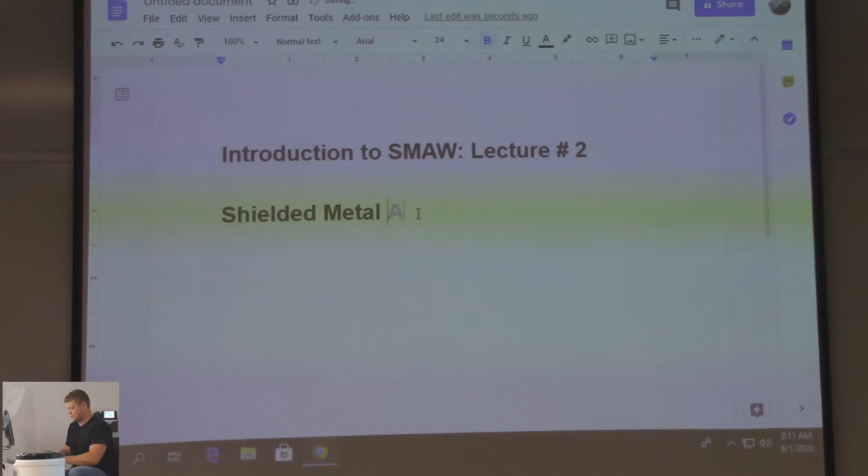So shielded metal arc welding refers to a method of joining two pieces of metal or adding metal to an existing surface. So that'd be like a surfacing weld. You're just trying to build it up. That's pretty much what you're doing with these blocks. You're just building it up, right?

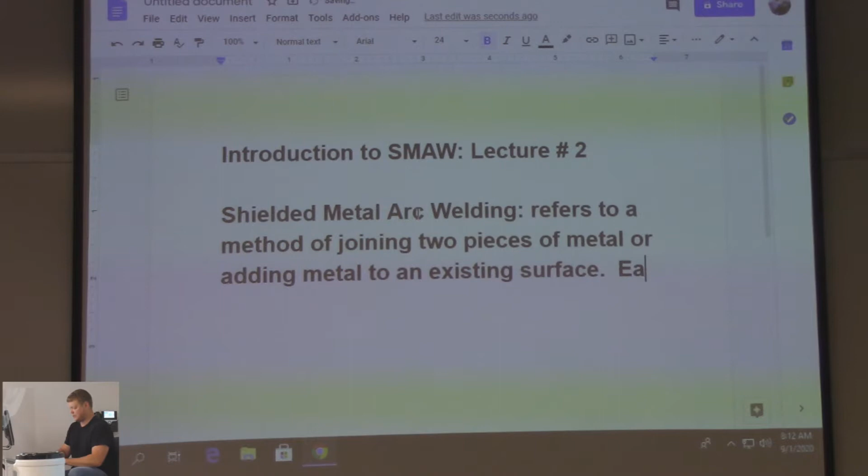Each word conveys an attribute of the process. So we're just going to break down the actual term, well, phrase, shielded metal arc welding. First word is shielded.

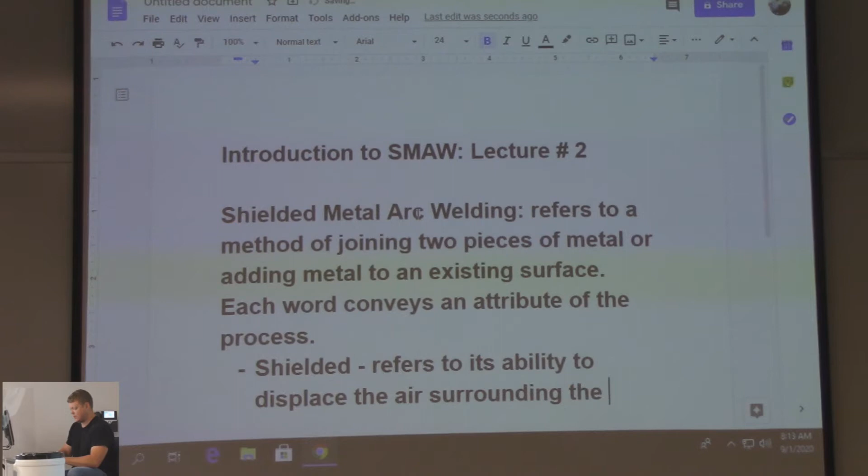Refers to its ability to displace the air surrounding the weld to avoid harmful effects of the gases in the air.

Atmosphere is made up of 79% nitrogen, 20% oxygen, some CO2, some other stuff, argon. If it gets into the weld, it tries to escape as it's solidifying and gets all this porosity. That's why you gotta have some kind of shielding. The stick welding is the flux. MIG and TIG has a separate shielding gas, right? That's why they have the tanks on the back that we were just talking about.

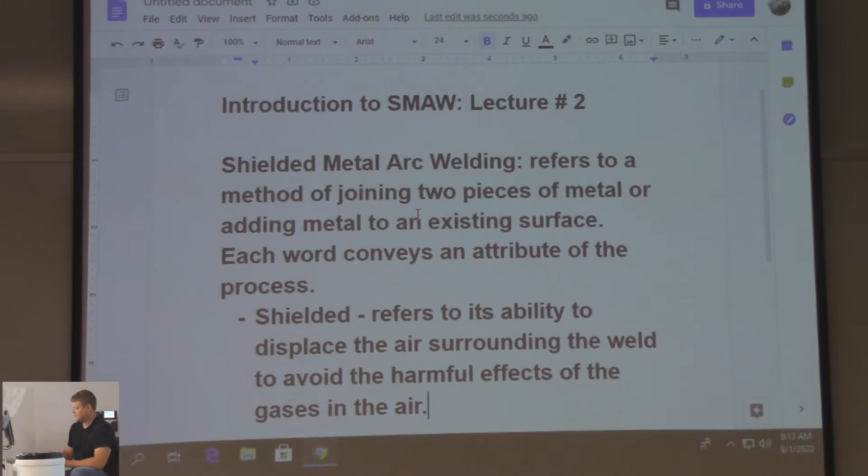So did you put new tanks throughout the lab then? Because like half of them were empty. No, we just put them in the tank area, and then whenever somebody wants to use them, they put them on. Yeah, remember, they're really heavy. Don't be a hero, and that's how you get a hernia.

Metal, generic term for the many, many metals there are, right? Whatever you're welding, that's what it's going to be composed of. So if you're welding low carbon steel, it's going to be low carbon steel. If it's aluminum you're welding, you're going to have an aluminum in the middle. Denotes the core of the electrode.

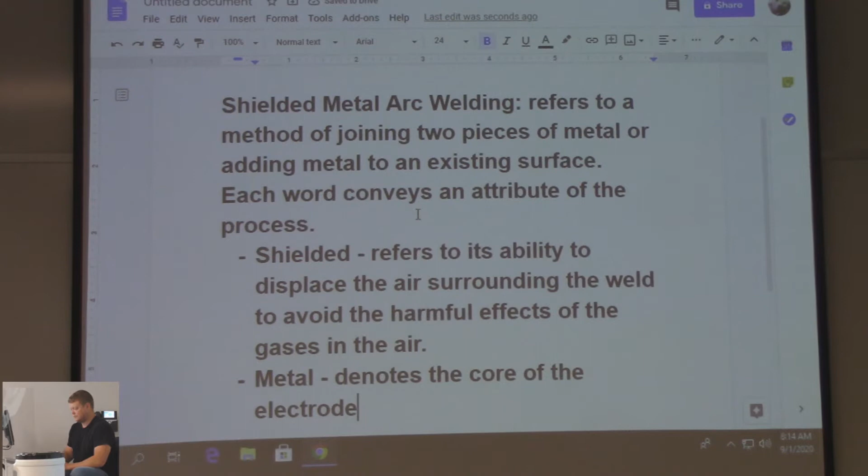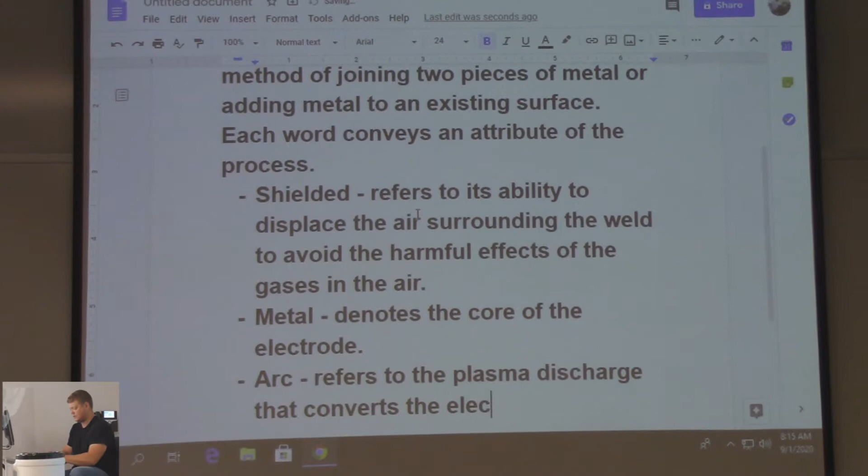Arc. Refers to plasma discharge that converts electrical energy into heat.

So there's an arc plasma in the welding processes, just like everybody thinks when they hear plasma cutters, but yeah, there's a plasma in the arc as well. Ionized gas, right? That's why the electricity goes over a gap, right?

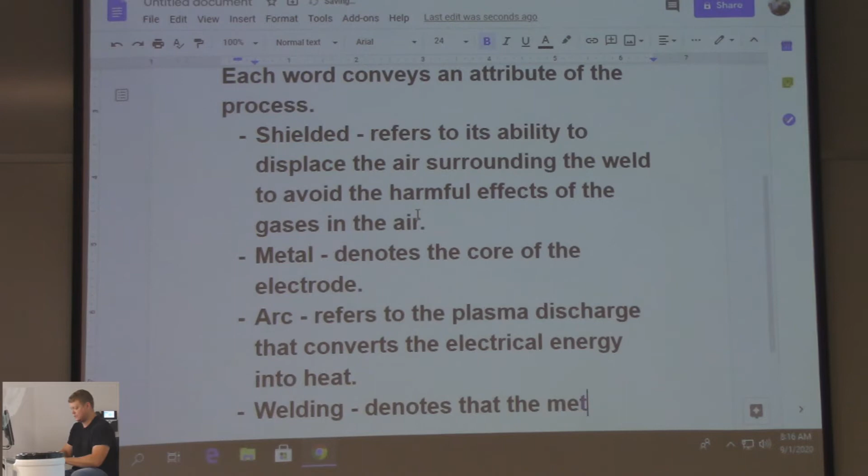Welding. Denotes that the metals are joined or fusion. It's mixing together, it's fusing, that's why it's so strong, right? It's not like a glue where it's just sticking together, it's fusing, it's mixing the base metal with the filler metal and fusing it.

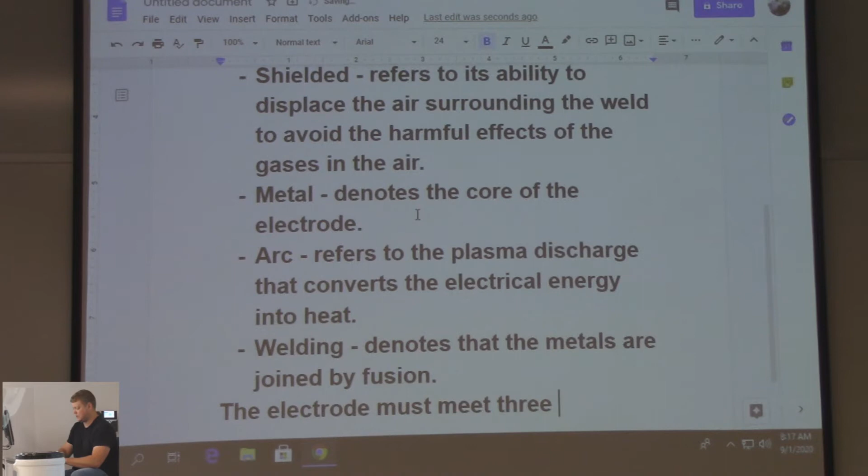The electrode must meet 3 pieces of criteria. It must shield the arc and the weld metal.

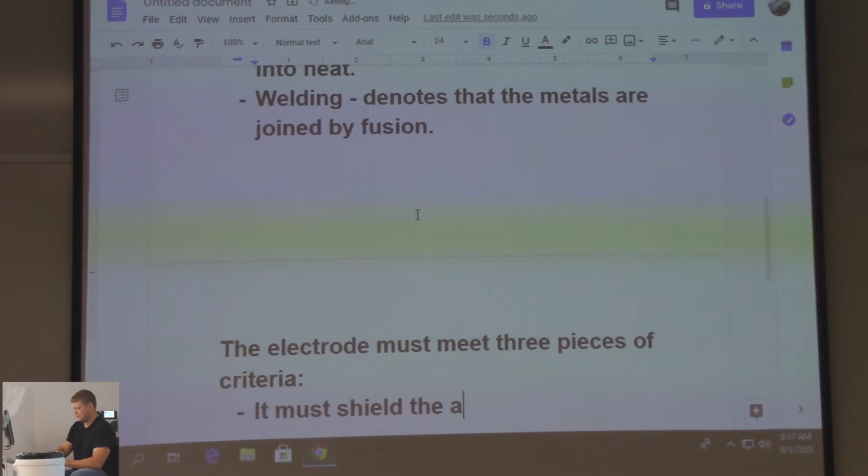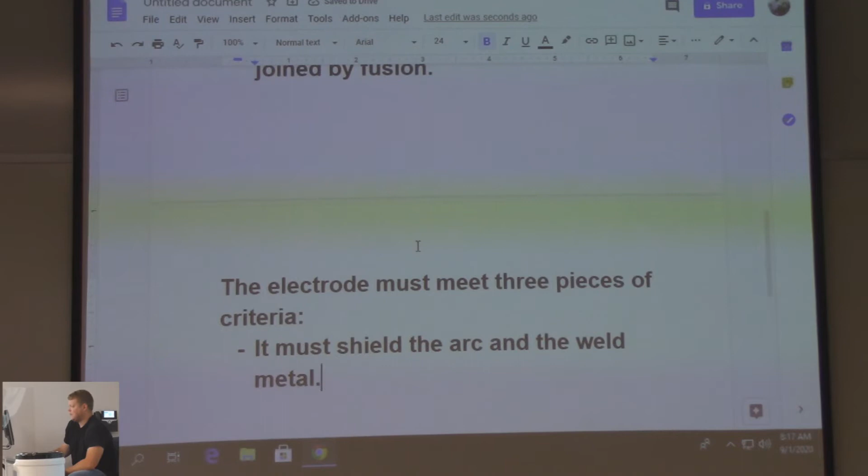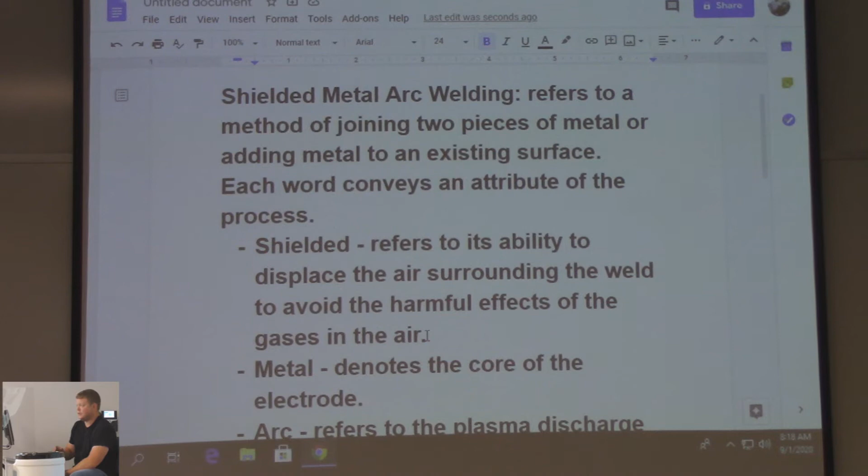Let's back this up a bit here for a potential test question, right? So I'm going to go back up here real quick. On the test, I write down, in regards to the phrase shielded metal arc welding, which word refers to its ability to displace the air surrounding the weld to avoid the harmful effects of the gases in the air? And you're right, shielded. It has to be shielded, metal, arc, or welding, one of those 4 words. People put stuff that's not the 4 words all the time, and I have no idea why they do. So it has to be shielded, metal, arc, or welding, right?

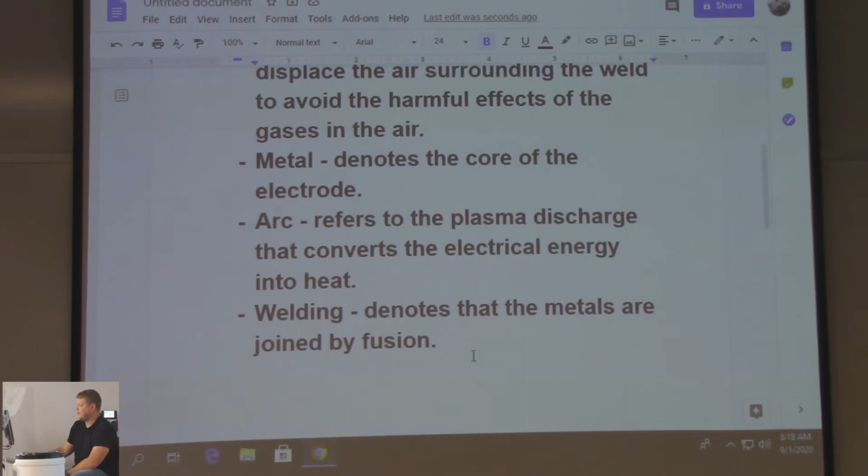So just so you know, with regards to the phrase shielded metal arc welding, which word denotes the core of the electrode? You're right, metal, right? Alright. People put other words besides shielded metal arc welding. It's very bizarre.

Lost it. Add metal to the weld. So we're back to the 3 pieces of criteria the electrode must meet. First was it's got to shield the arc and the weld metal. The next one is add metal to the weld.

We missed you. My phone is on silent, so my alarm will go off. It happens. Not too bad. Does everybody have their phone, stuff they use for their alarm clock? I used to send Remind messages out and they'd be like, you woke me up at 6 o'clock in the morning. I was like, why do you have your phone right next to your head? That's what I use for my alarm. I got one of those old alarm clocks, the digital things where it goes off, you go into panic mode and start fighting yourself in the bed because you don't know what's going on. It has one of those, so loud that the windows vibrate. Yeah, I jumped up at 3:15 this morning, like, oh, I'm gonna be late. I'm just like, my alarm went off. Oh my God, no, it didn't. I just heard it in my head. Panic attack.

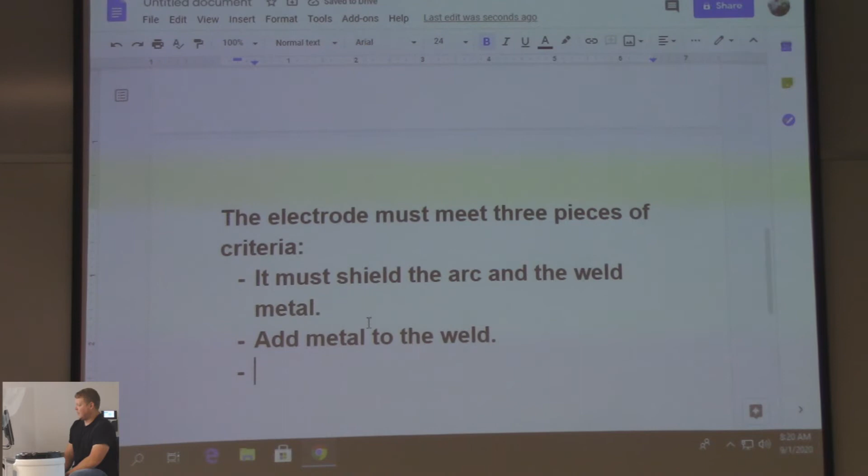It's got to shield the arc, the weld metal. It's got to add metal to the weld, and it's got to sustain the arc. They put arc stabilizers in the actual flux. So it's going to add metal, it's going to shield it, it's going to sustain the arc. If you take a bare electrode and try and weld with it, it goes all spastic and all over the place. You'll see that with your 7018 when you break the end of the flux off, when you first start, it goes all spastic. That's what it is. It doesn't have the arc stabilizers in it from the flux.

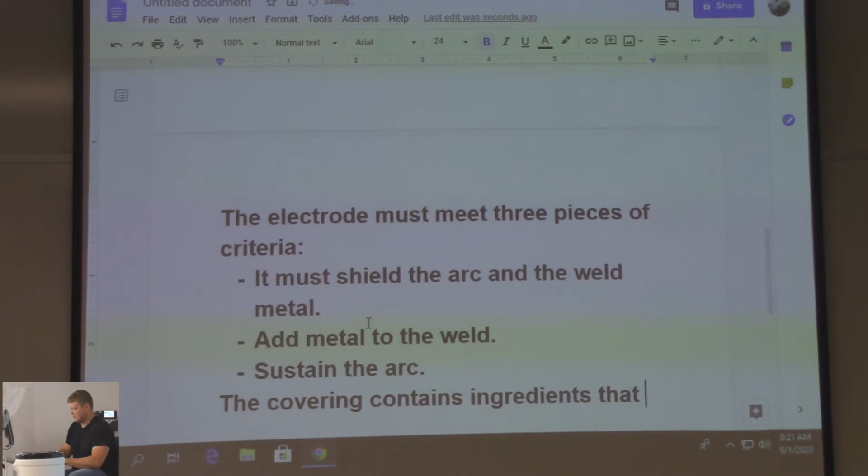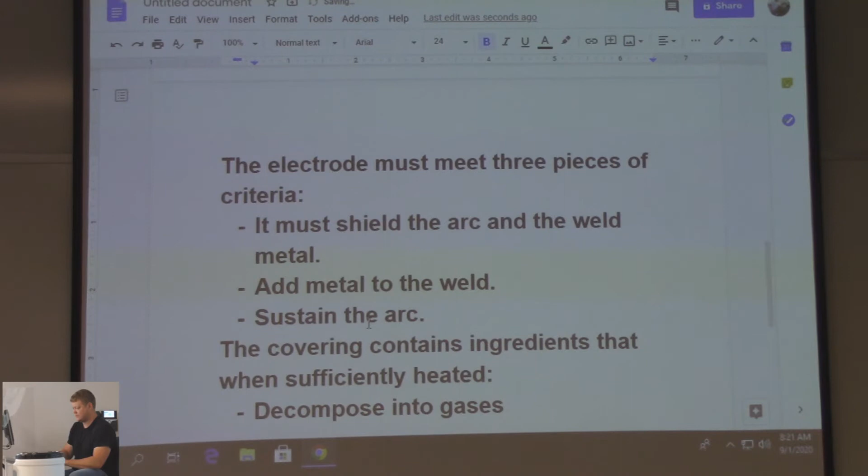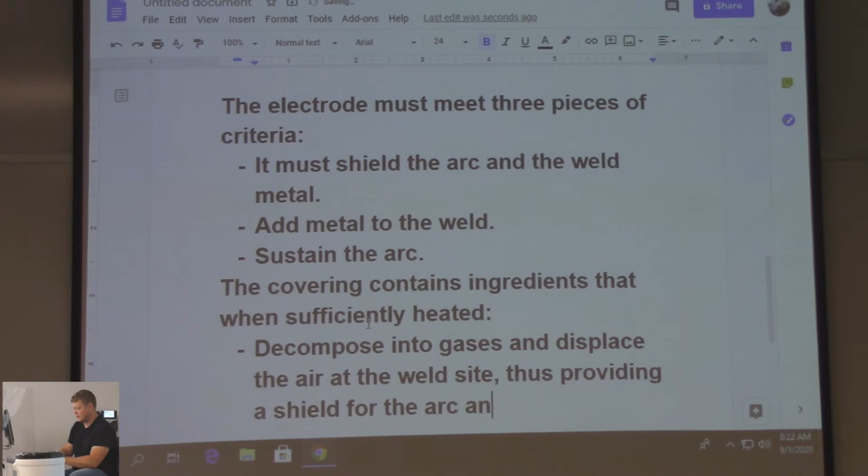The covering contains ingredients that, when sufficiently heated, decompose into gases, displace the air at the weld site, thus providing a shield for the arc and the weld metal.

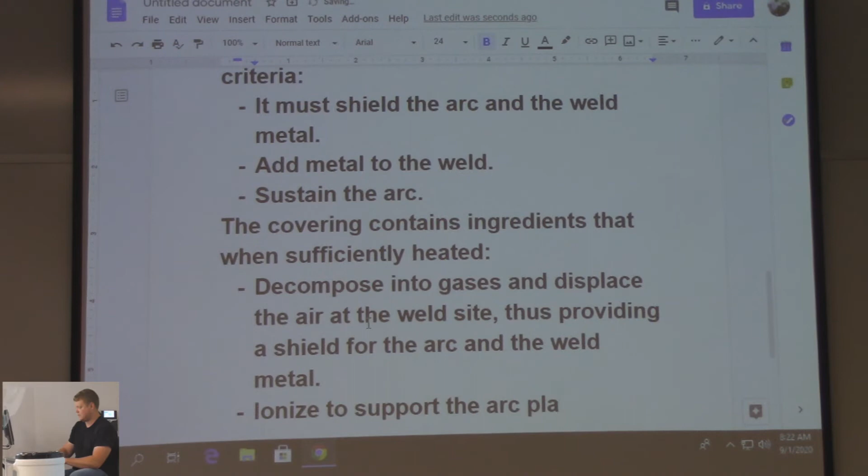You're seeing a common term, right? Shield. So it's got the name shielded metal arc welding. Ionize to support the arc plasma. We're not going to go into ionization, right? But when you get into chemistry, we're going to go over all that stuff, and welders all say, "Why do I got to take chemistry?" There's an amazing amount of chemistry involved in welding. You can get into it really deep if you want to.

I took a class called Arc Physics at Ohio State. It was the hardest class I ever took, going over the physics behind an arc. It's pretty rough. I tried to cheat on it. I got a guy with a PhD in physics to look at it, and he goes, "I can't figure that out." Walked away. I was like, "Oh, that's what I wanted to hear. Great." So there's a lot of chemistry involved in welding. People just don't know it, usually. All that bonding stuff, right? Ionization. Yeah, anyways.

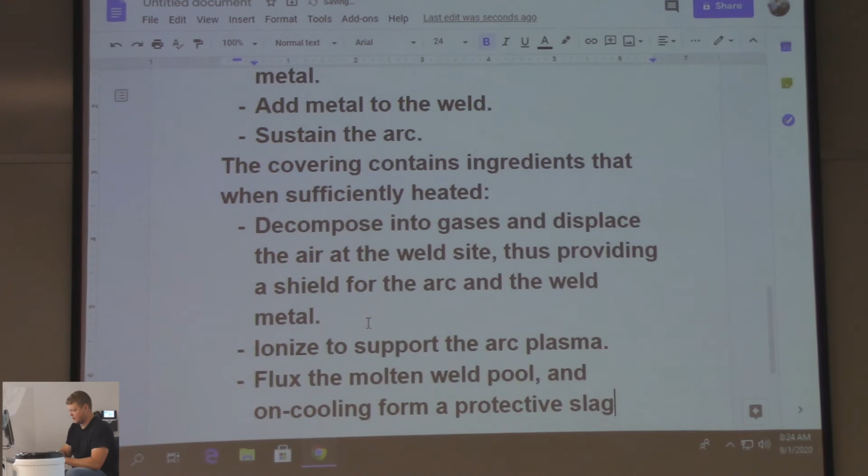It's got to flux the molten weld pool. Anytime they're talking about fluxing, it means drawing out the junk. It's going to flux the weld pool, and on cooling, form a protective slag cover on the weld bead.

So that slag cover, we're talking about the slag lifting up as you're getting done. That's not bad, but it'd be better if it stayed on because it's shielding it still as it's cooling. It's kind of like a post-purge on a MIG or TIG where the gas keeps coming out after you're done. That's the same thing with that slag. When it's still cherry red or orange, it can still draw in atmospheric contamination. So when that bead lifts up, it's not exactly a good thing. It's not necessarily bad enough to make the weld have a bunch of holes in it or anything, but it's there for a reason. It's there to cool it and protect it from the atmosphere.

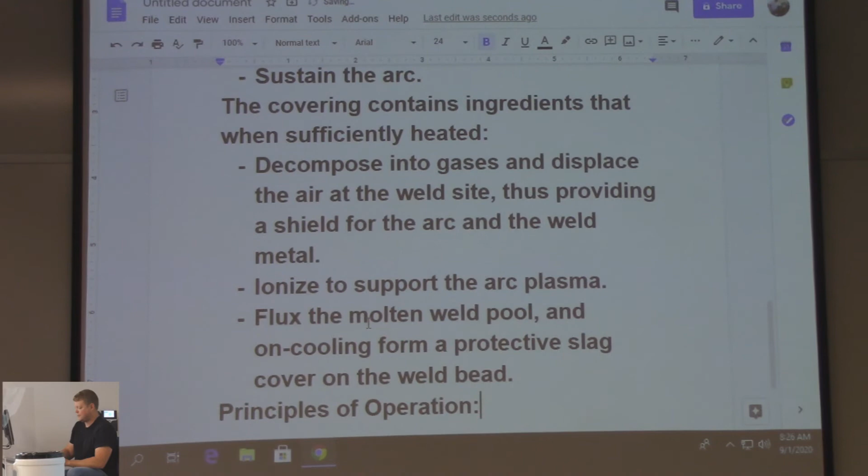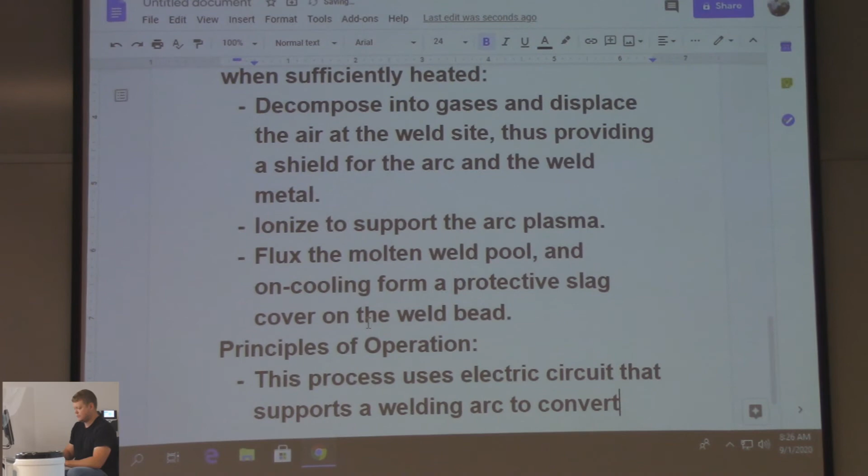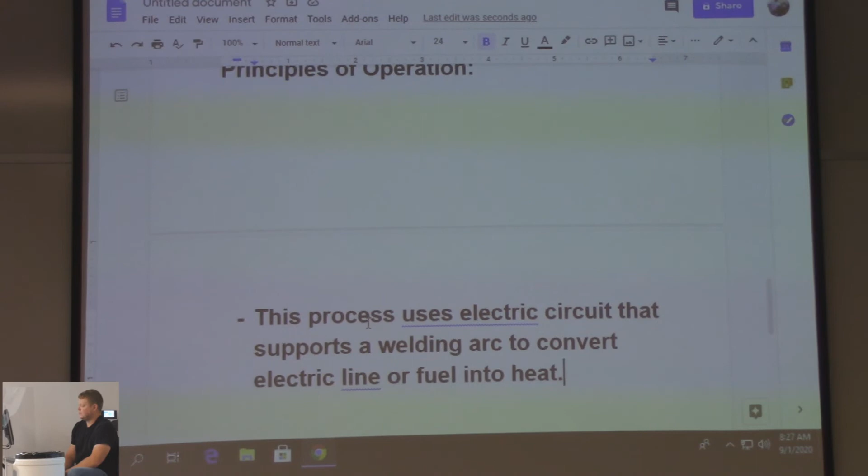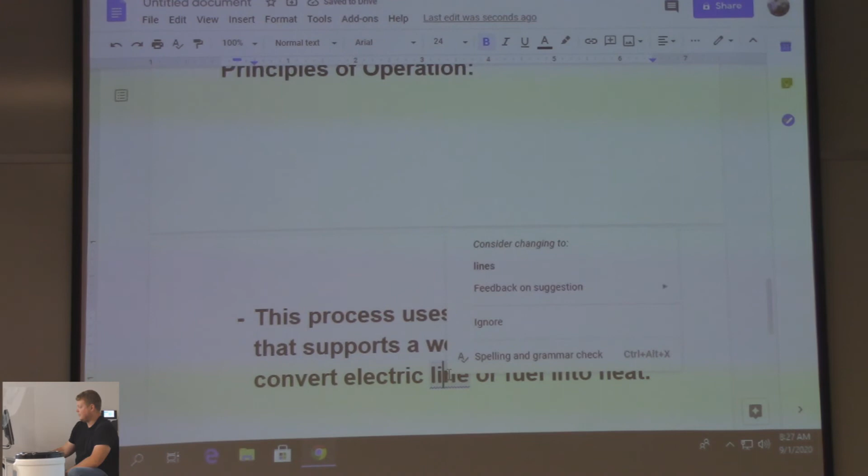One more section here, principles of operation. So this is what's happening with the whole process, a step-by-step list, I guess. The process uses an electric circuit that supports a welding arc to convert electric line or fuel into heat. I feel like people don't think of electricity as a fuel, but it is. We got underlines all over the place. It uses an electric circuit to convert electric line. Lines? No. Ignore. Google's never wrong, right? So it's turning electricity into heat.

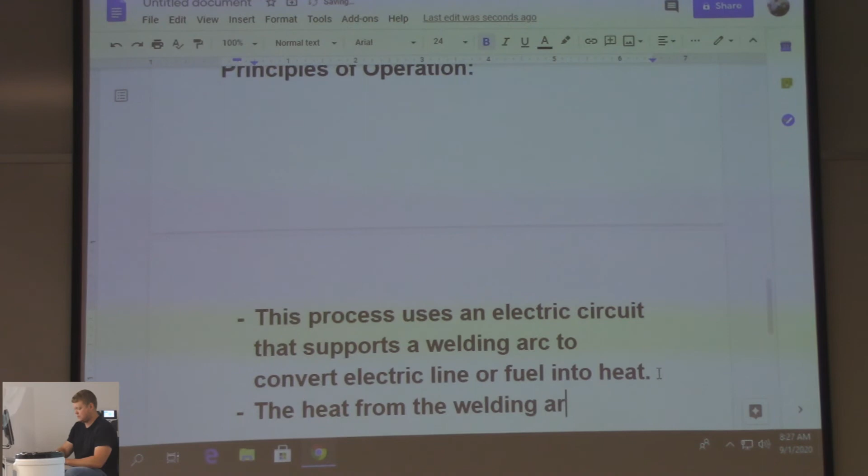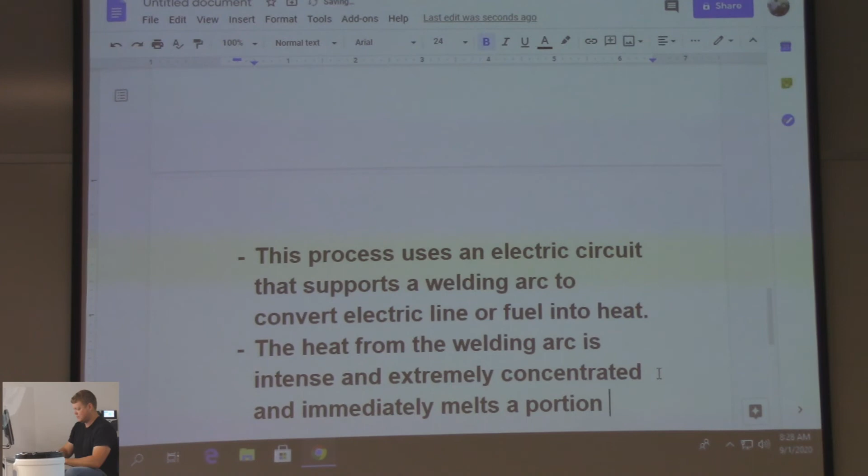The heat from the welding arc is intense and extremely concentrated, and immediately melts a portion of the workpiece as well as the end of the electrode.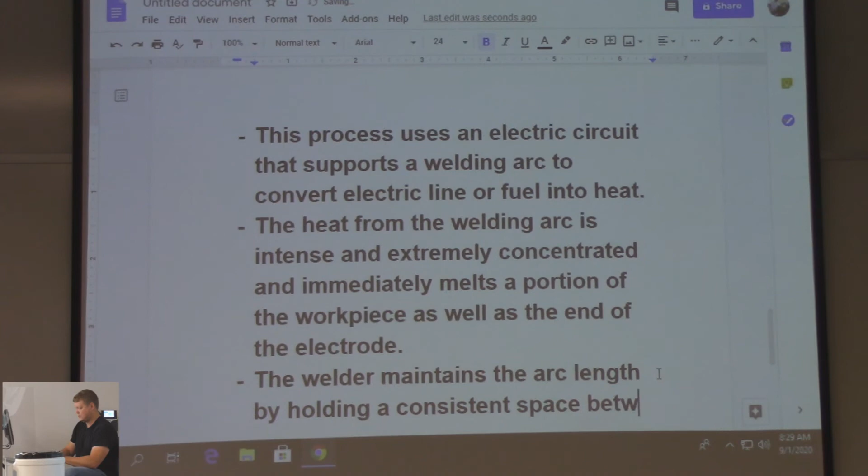So it's going to melt both the workpiece and the electrode and then fuse, right? The welder, and by the welder we mean the human being running the welder, not the actual machine, maintains the arc length by holding a consistent space between the electrode and the weld pool that forms on the workpiece.

Whew. Arc length is important, right? Bold it. Oh, it already was bolded. Underline it. Italics. You want to maintain a consistent arc length that keeps your electricity going nice and smooth. Doesn't have fluctuations going all over the place. When you raise and lower that arc length, the volts are going all over the place, right? It's a constant current machine. It's going to try to maintain the current, so the volts are going to fluctuate. It's all in a mathematical formula because every welder likes math. It's fact.

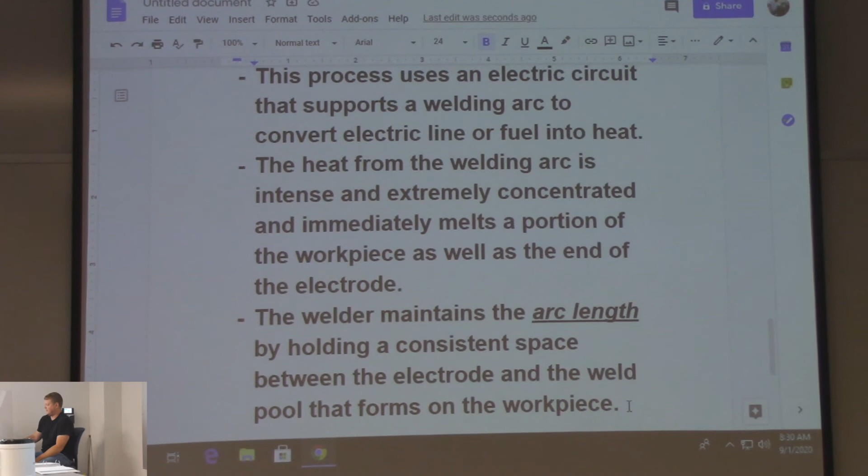Last bullet. One thing I forgot to mention last class was how to extinguish the arc, right? Which I know you all figured out, but you just pull away, right? That's how you get rid of the arc. It's not like MIG or TIG where you stop pulling the trigger or stop pushing a foot pedal down. You just get away from it, and that's what makes the arc stop. You're basically just breaking an electrical circuit. You all figured it out, right?

It's an obvious thing if you've welded before, but if you've never welded before, I've had people go, how do you get it to stop? Just pull it away, man. There's people that have never welded before and they don't know. And they're welding away and then they're yelling in their booth and then they pull it away really slowly and it's like, whirr, you can hear it when somebody does that. So, it's the lightsaber effect, right?

I've never seen any Star Wars movie, just so you know, and I take great pride in that. One of my buddies is a Star Wars freak. His name is dog Yoda. He's got a Boston Terrier named Yoda. He's got Yoda figurines. It's the only reason I know anything about Star Wars. You don't gotta be nuts about it, but at least watch the movies, they're pretty good. Are you kidding me? I haven't watched the movies either. Good man right there.

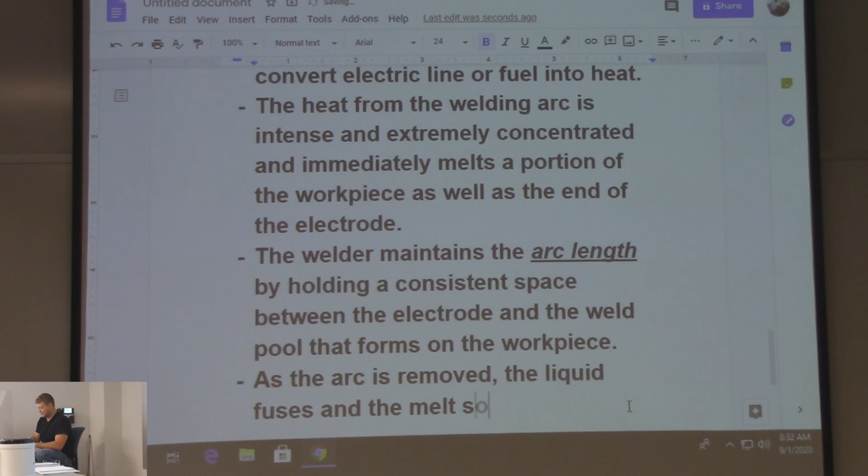As the arc is removed, the liquid fuses and the melt solidifies into continuous metal.

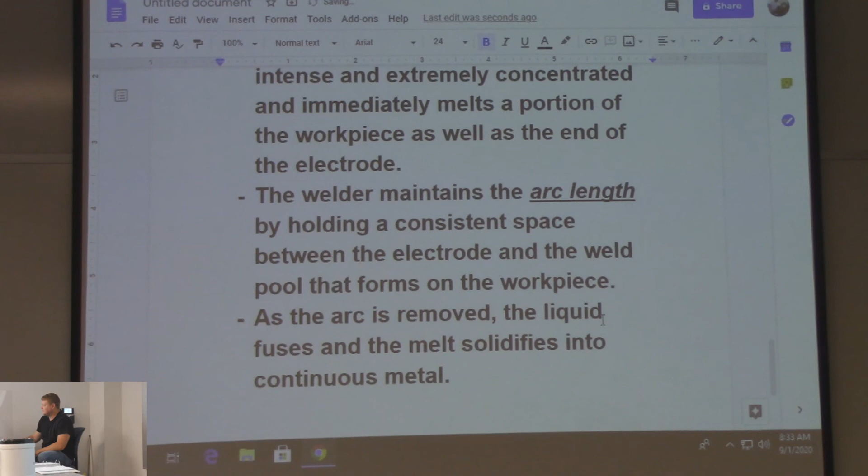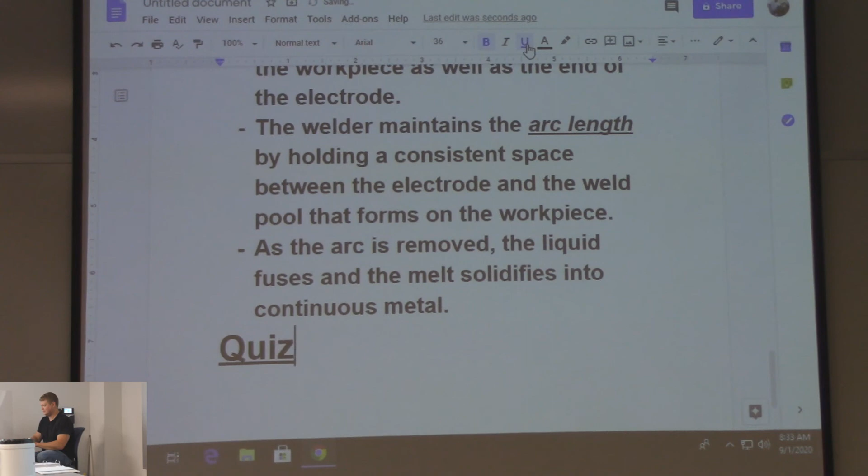You can't tell me you never played Star Wars Battlefield. Nope. True story. Battlefront, sorry. You're gonna want to keep that to yourself. No, it's a pretty good game, actually. I played the game. See, he's played the game. He hasn't seen the movie, he's played the game. I played it on the NES. Oh, yeah. I played it on the original Xbox. Battlefront 2 was my favorite. It doesn't get more exact than that. I didn't know. Oh yeah, you did. I got it on video. I can back it up. Rewind. You knew.

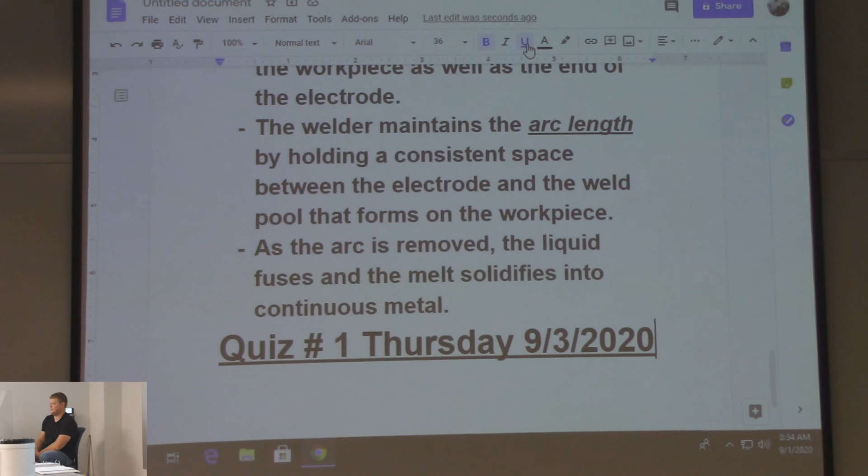In the lab, we're going to continue on our flat. I'm going to draw some stuff here on the board. I forgot to tell you last class. But I have to go get my board kit. Because you don't have the markers because of Corona. Yes. All right.